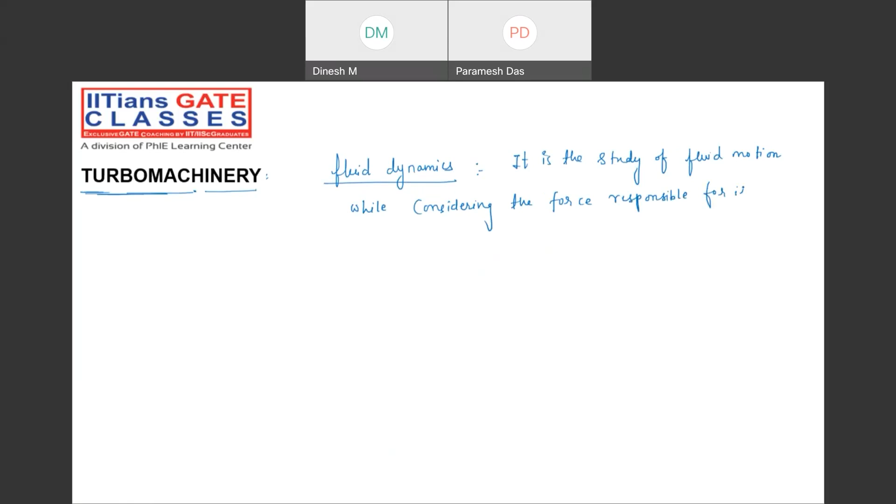Yes or no, guys? So when I talk about the total energy, whatever we have covered from the Bernoulli equation, there is a limitation in Bernoulli, right? When you follow a very good standard textbook, you will find that Bernoulli's equation has some flaws. Can you tell me which flaws? What are the limitations of the Bernoulli equation?

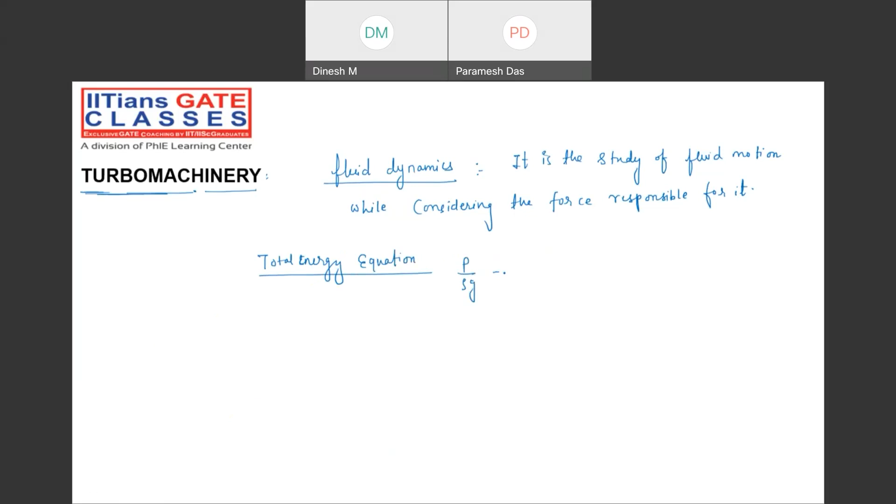Suppose I'm writing the total energy equation as P by rho g plus V square by 2g plus z equal to constant. This is the pressure energy, this is the kinetic energy, and this we call potential energy. Potential energy generally comes from spring force as well as gravity force. Here we don't have any spring forces, so whatever work is done against gravity will be stored in the form of potential energy, right?

Now, first of all, tell me what is the unit of all these parameters? Meter, right? So can I write energy, Newton meter, divided by weight of the fluid? Yes. Energy per unit weight. Now just verify it. Energy is Newton meter, weight is Newton. It will cancel out, and the unit is meter only, right? Perfect. So now just note down the important points.

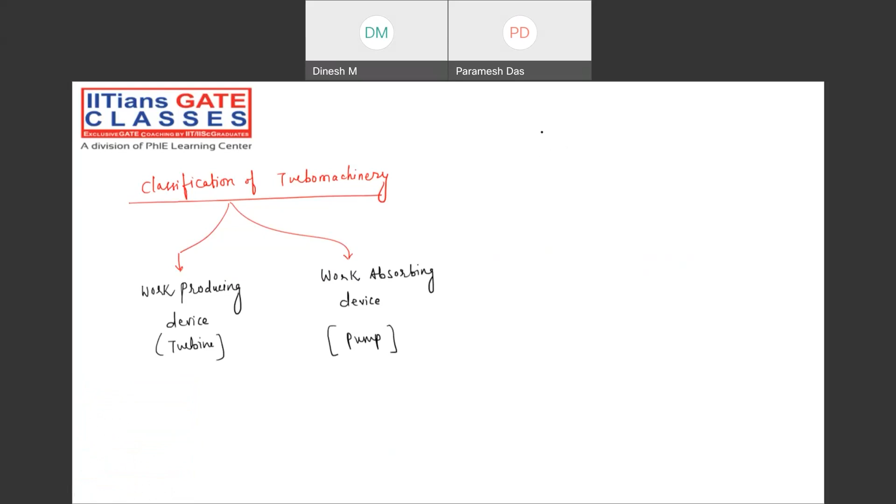And of course, there is a difference between pump and compressor. Compressor is also one type of work absorbing device. But there is a slight difference between pump and compressor. Can you please tell me? Pump is able to handle incompressible fluid, whereas compressor is able to handle compressible fluid. Pump is for liquid, for incompressible fluid, and compressor is for compressible fluid, gases. Yeah, that is correct. But can't we use compressible fluid in case of pump? With the help of pump, can't we send it?

You can write for pump: for incompressible fluid. And here you can write for compressor: for compressible fluid. One more difference is there. Pump is used to increase the pressure of the fluid, right? Yes or no, guys? But if you observe, in case of compressor, it is used to increase both temperature and pressure, right?

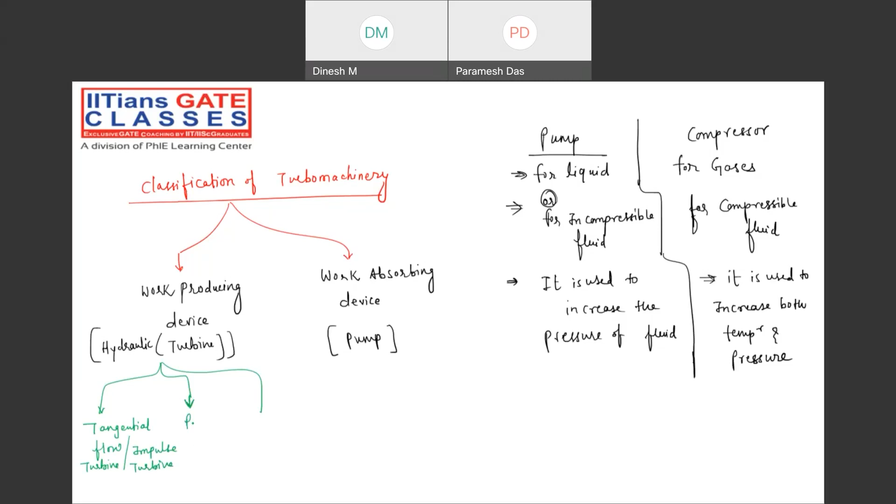Okay. Then can you please tell me the examples for those? Tangential flow, such as Pelton turbine. Tangential flow. Can I call this tangential flow an impulse turbine? Yeah, obviously, impulse turbine we can also say. Pelton and impulse are the same. Now, can I call reaction turbine? No, reaction is different. Reaction is a radial flow turbine. Yeah, that is what I'm saying.

In the reaction turbine category, when the pressure and kinetic energy both change for the fluid, then we say reaction turbines, right? In the impulse turbine, what happens? The pressure will be constant, only the kinetic energy changes. We sometimes call the reaction turbine an impulse reaction turbine, because whatever power is generated is generated with the help of both pressure and kinetic energy changes. Yeah, that is correct. Very good. Now tell me, in that category, what will be the example?

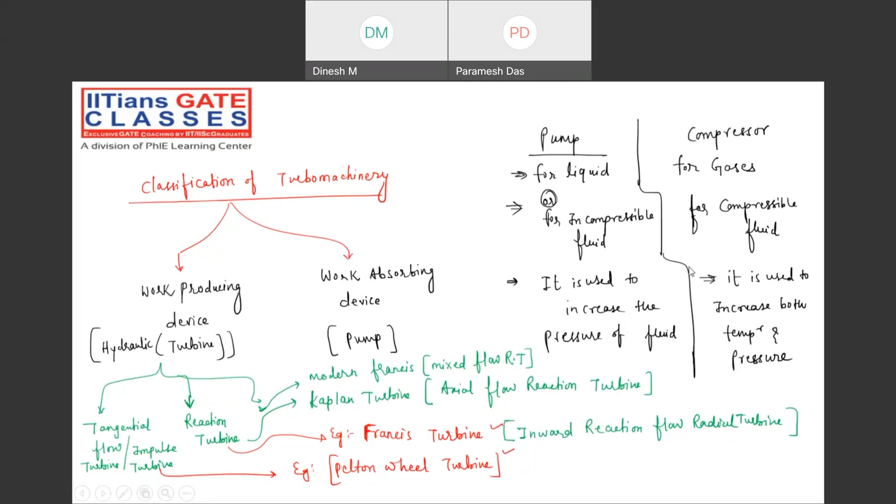Can I move to the next slide? Yes, sir, please. Before that, just note down the books that you need to follow for turbo machines, because that is mandatory. This class will be recorded, and that will be uploaded to the YouTube channel. So I need to tell the students who are seeing the recorded lectures.

So, reference books that you can follow. Of course, Yunus Cengel will be the all-time great book for fluid mechanics and basically for all thermal subjects. For reference books as far as turbo machinery is concerned, you can follow DS Kumar. Rather than saying for problems, I would say follow it for the theoretical portion. The second book will be R.K. Bansal.

Of course, some mistakes are there, but you can avoid them. Not in the turbo machinery, I'm talking about the fluid mechanics. Some mistakes are there, but for numericals regarding turbo machinery, you can follow this book. Right?

Sir, actually, I have one query. In most of these books, such as D.S. Kumar or R.K. Bansal, the coverage is too much. So they are referred mainly for competitive exams like GATE. But I want to know which book will be suitable for interview purposes, because in interviews mostly practical-approach questions are asked, which are not needed in competitive exams like GATE. So you're asking basically for interview, right?

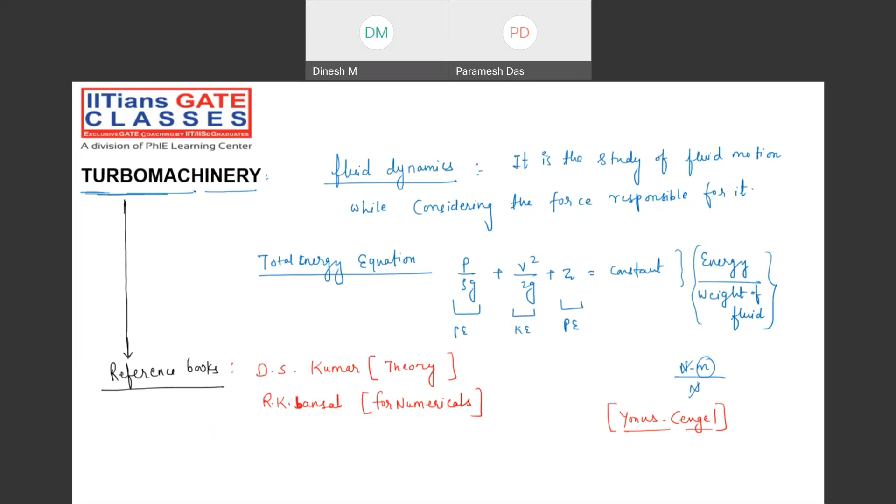In that book, everything is written in a very prescribed manner and in very simple language, so that you can understand easily and explain it to the panel sitting in the interview. When you are able to communicate to the panel members in a layman's manner, so that a layman can also understand what you are saying, they will give you full marks. That is the strategy for all the interviews that are happening. Right? Yes, sir.

So now, there is a very good reason, if I talk about the reaction turbine, and then the impulse turbine. Of course, you might have studied them, so you can correlate whatever I will talk about for the next few minutes. We get shaft power when there is runner power, right?

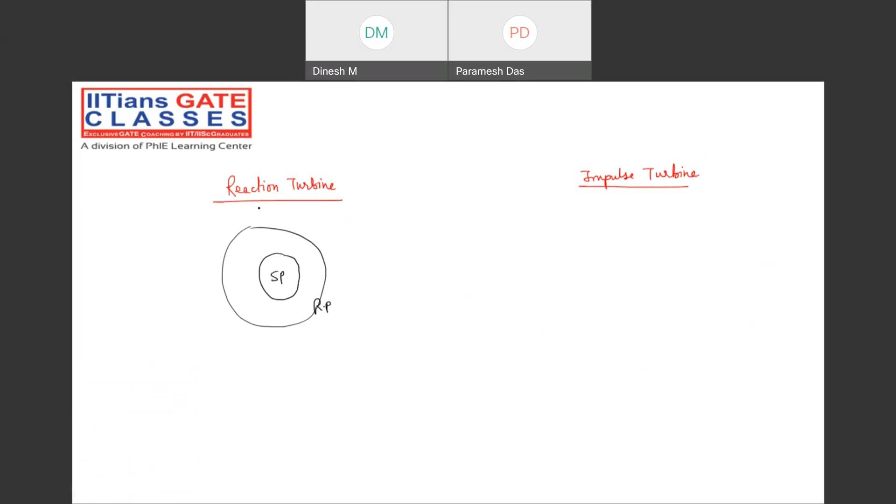Runner power means rotor power, the rotation of the blades. The blades which are attached to the shaft will rotate, and because of that, rotational power will be there, right? Now, from where are we getting the rotational power? From hydraulic power, right?

Yes or no? So within the two stages, 1, 2, we are getting what? Shaft power. Understanding my point? Now, suppose for the same shaft power, of course, that shaft power is coming from the rotational power, right? Or we also say runner power. RP is what? Runner power, right?

We have so many components attached to the hydraulic turbines. It's not only the blades. We have the runner also. That complete portion we call the runner, right? After that, we are having what? The closed chamber. Understanding my point? An outer casing will be there, right? That sometimes we call the diffuser section.

Now, shaft power, then we have runner power. This runner power we are getting in the impulse turbine not directly in the form of hydraulic power. We are getting it first in the form of kinetic energy, because a nozzle will be attached. Understanding my point? Through this nozzle, whatever hydraulic power, water power is there, that has been converted.

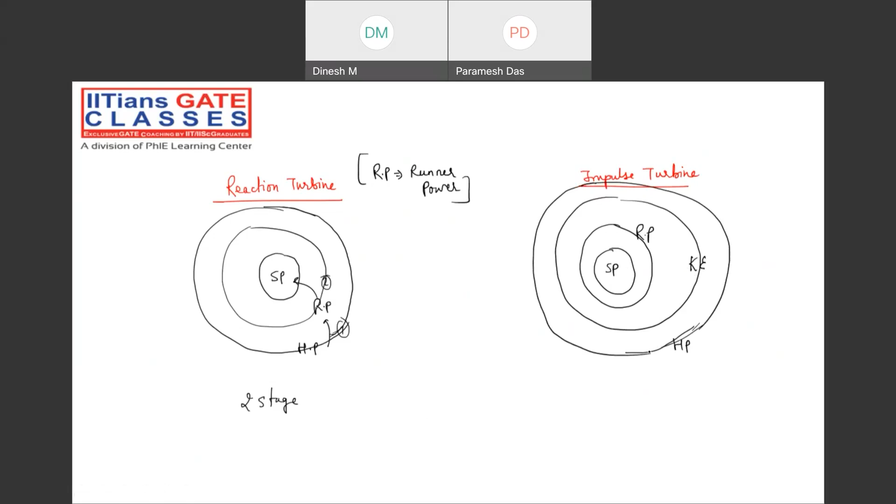First of all, see, this is the storage. Suppose from here the pipeline has been connected. Through this pipeline, the nozzle has been connected. Through this nozzle, whatever happens will be imparted into the blades. So this is the nozzle, this is the pipe, and this is the height.

So through this particular height, whatever hydraulic power is there, mgh, that is going to impart a lot of energy, but that is happening through the nozzle. Many nozzles are placed around the runner of the Pelton turbine. Basically, we are not placing more than 6 because of efficiency losses in the nozzle.

Now, this nozzle is going to have some efficiency. Every instrument has some efficiency; it cannot be perfectly 100% efficient. So first of all, whatever hydraulic power is there has been converted to kinetic energy. What is the efficiency of the nozzle? The kinetic energy of the water imparted to the blades, divided by mgh.

Now, definitely I need to write hydraulic power, then kinetic energy, then rotational power or runner power, then shaft power. So here we are getting the same amount of shaft power in 3 stages: 1, 2, 3. Understanding? Yes, sir. Now, when we get the same shaft power in 3 stages, which is going to have the higher efficiency? Reaction only, right? Reaction turbine.

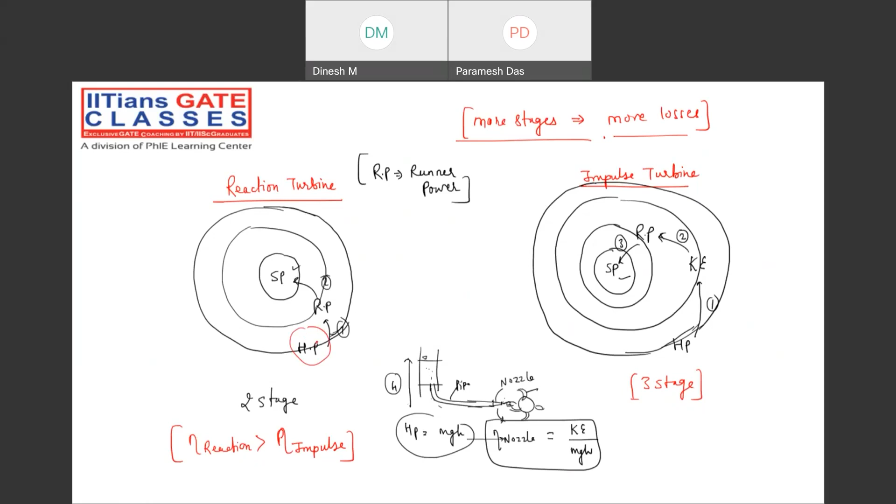So that's broadly the idea. In the reaction turbine, we don't have anything called a nozzle. If the nozzle is not there, the hydraulic power will be converted directly to runner power, right? And that runner power will be converted to shaft power. Understanding my point? Yes or no? Yes, sir. Perfect. Just note down.

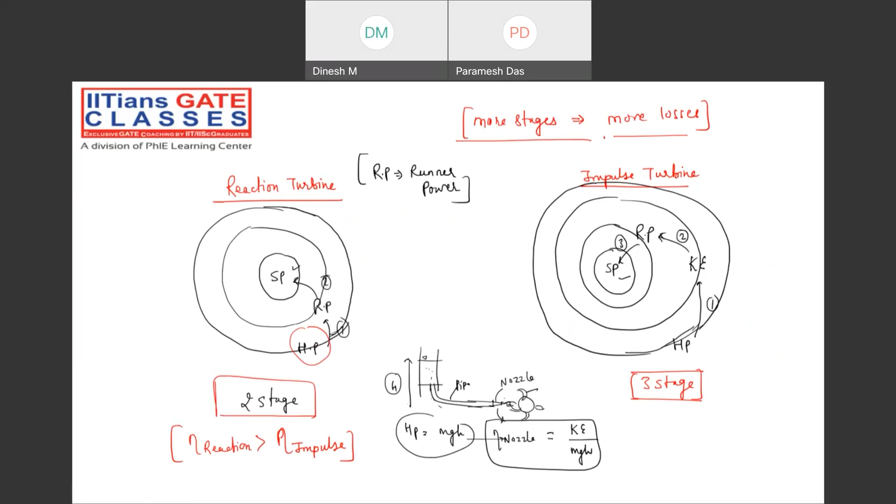Once done, let me know. Yeah? Noted. Noted, right?

Now, when we are going to start turbomachines, before that we need to clear some fundamentals about the impulse momentum equation, because without it nothing can be done in turbomachinery. So what is the impulse momentum equation? The rate of change of angular momentum between the inlet and outlet of the blade is equal to the torque.

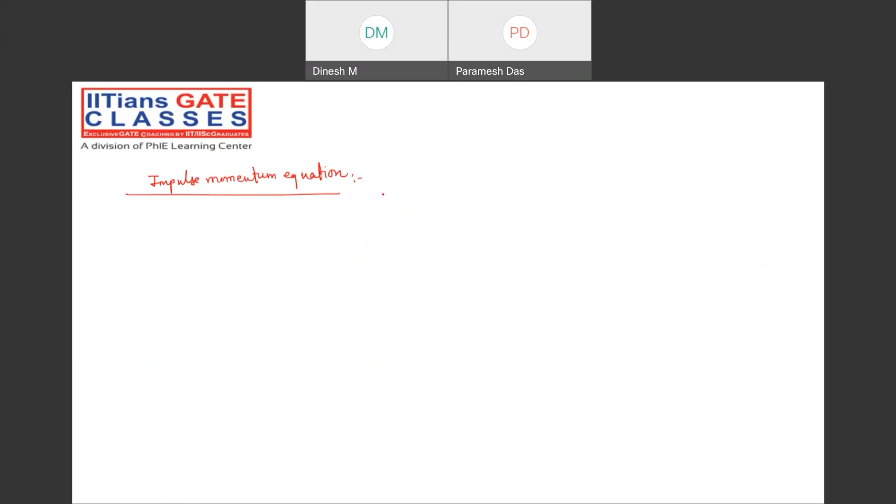Rate of change of momentum is directly proportional to force, right? Yes, sir. Force is nothing but the rate of change of momentum. In equation format, momentum is m into v, right? So force I can write as mass flow rate into v final minus v initial. That depends on which force you are calculating. Vf is nothing but v final, that is the final velocity.

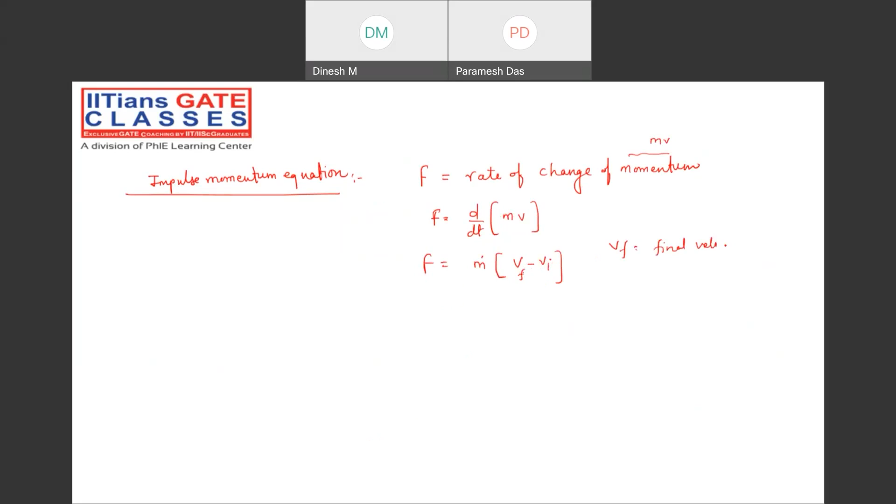Vi means suppose that initial velocity. Then what is the force, my dear friend? Suppose I'm taking one example: impact of jets. Did you cover this topic? Yes, sir. Okay, perfect. So in this also we will see a lot of things, and that will be beautifully explained: impact of jets, like when the plate is vertical, horizontal, inclined, or maybe it is having some curvature, then what is the amount of force that has been exerted.

Now let me just tell you an example. There is a nozzle. Through the nozzle the water has been coming out. Now this has been exerting the force onto this particular plate. Suppose that this is a plate. Because of the water forces, this plate will try to move to the right direction, right? Yes, sir. Now to hold on that, we need to apply some kind of force.

This force will be called force exerted by plate onto the fluid element, right? And whatever the water force will be there, that I'm going to call F1. Let me call this to be F2. Of course, F1 will be equal to F2, but the direction will be opposite. Understanding my point? Yes, sir. So F2 is the force exerted by the plate onto the jet of the fluid.

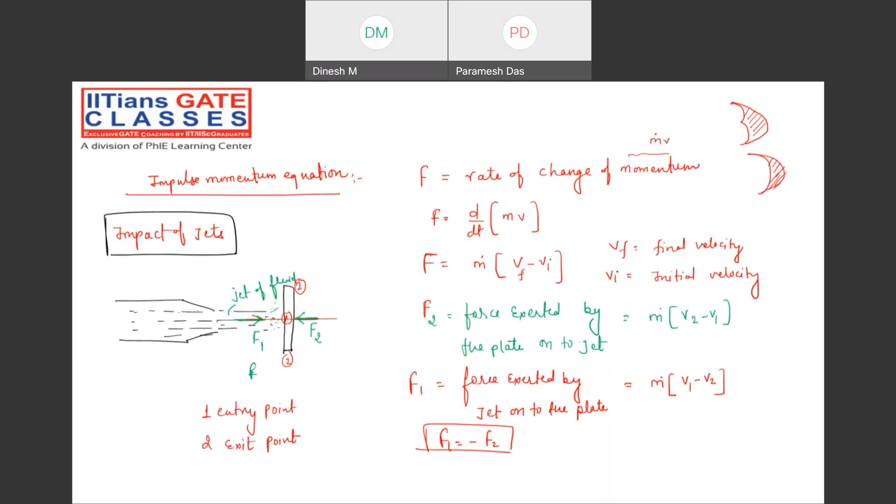Now, once it is done, let me know. Yes, sir. Note it down. Done. Okay.

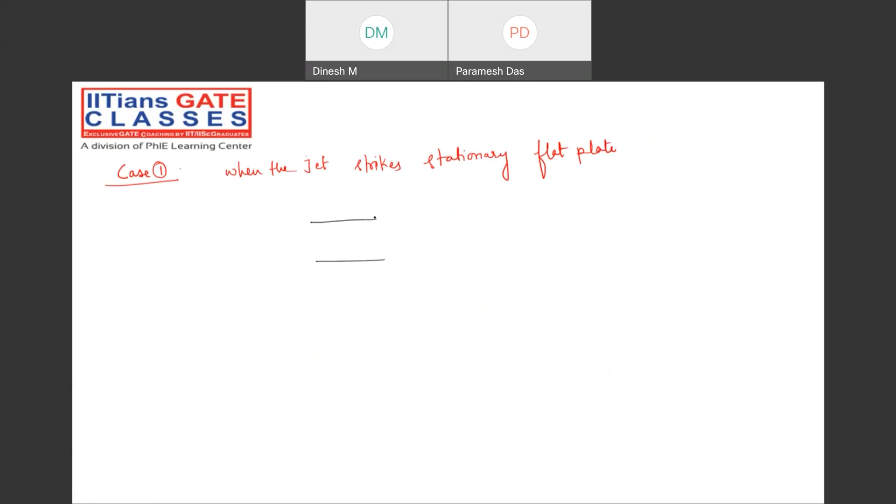Now try to understand. Case number one is when the jet strikes a stationary flat plate. What is going to happen? Let me draw the figure for this case. The water is coming out from this nozzle, and there is a vertical plate, and this plate is fixed, my dear friend. So this plate cannot move to the right direction by the application of force by the jet. Now tell me, what is the initial velocity?

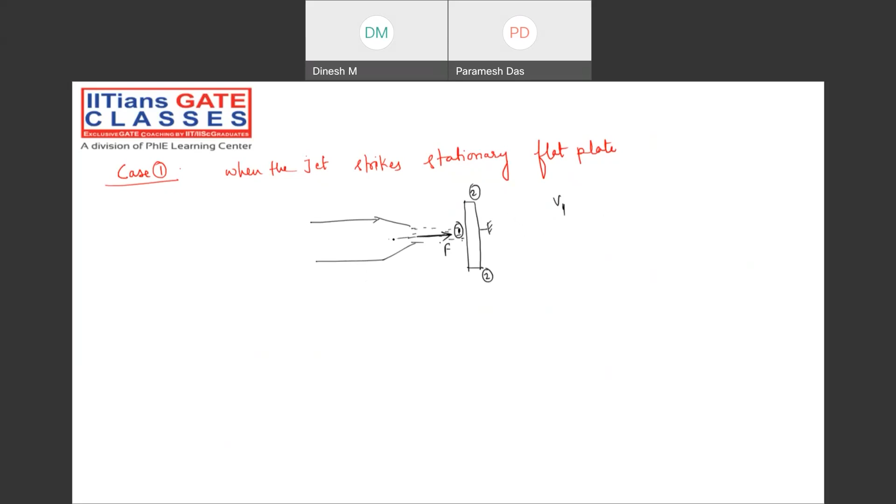1, 2. What will be the initial velocity? Tell me, guys. V1, right? Whatever velocity the water is coming out with, that will be V1. Now tell me, what will be the final velocity, my dear friend? Let me call V1 to be V. Whatever the velocity with which the water is striking this particular plate, that is called V. This is the nozzle jet through which the water is coming out.

Now tell me, guys, what is going to be happening over here? This jet is forming the diameter to be d. Now tell me, after striking the plate, this water will be taking the shape like this or not? Yeah. So initially, whatever the velocity is there, what will be the final velocity in x direction?

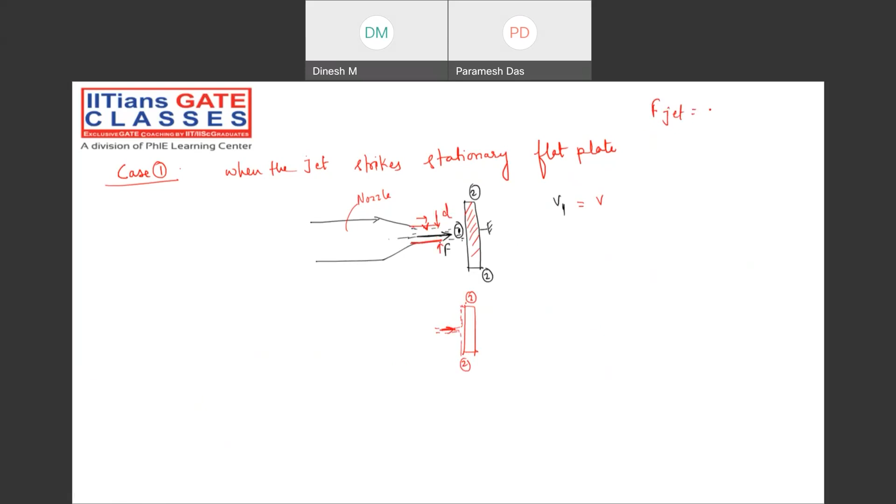See, whatever the formula we are writing, force of the jet onto the plate equals mass flow rate into V initial minus V final in the x direction only, not in the y direction. So here, after striking, it is moving like this. Check it out. So finally, the velocity at point 2 is 0 in x direction.

Right? So what will be the force exerted by the jet or stream of fluid onto the plate? That is the mass flow rate into V. Now, how to calculate the mass flow rate? Rho into Q. Now, how to calculate Q? Whatever discharge is coming from the nozzle, the same discharge will be coming out from the jet also. So directly I'm writing Q will be equal to pi by 4 d square into the velocity with which it is coming out from the nozzle, right?

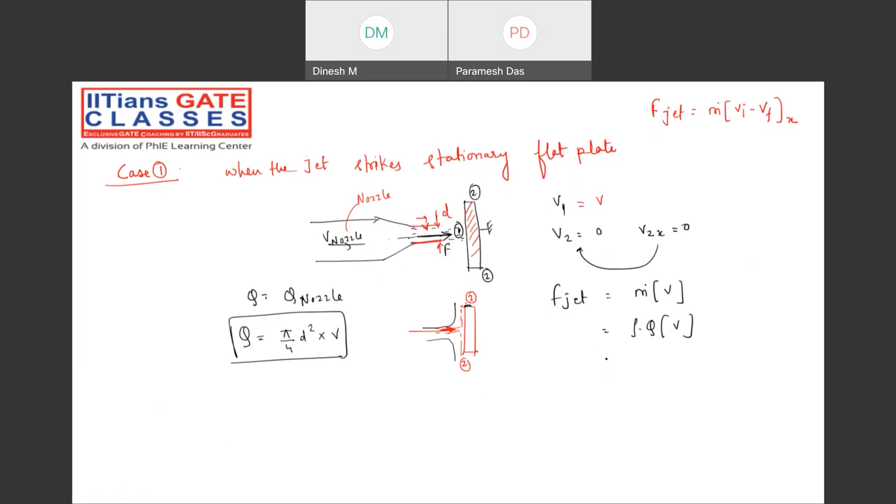It is coming out with the velocity V, but in the nozzle, it may have a different velocity. We are not bothering about that, right? So here we can write Q is equal to area of the flow into velocity, so rho into A into V into V. So what is the force exerted by the jet? Rho into A into V square, right? In the x direction, the force exerted by the jet will be this one. Yes or no, guys? Perfect. Just note down, very, very important.

So here, the impact is exactly at the middle point. Sometimes we call this the symmetrical condition, so that it is striking exactly at the middle. Whatever velocity is coming through the nozzle, it is striking at the center line of the plate. Now, what are the forces in the y direction?

Whatever force you have calculated, of course, that is fine. But when you are fixing this by some hinge joint, it is going to have reaction forces in the x direction as well as in the vertical direction. The horizontal reaction you have calculated, that is fine. But what about the vertical reaction forces, my dear friend? For that, we need to find the force of the jet in the y direction. Am I right? How to calculate that? First of all, tell me what is the answer for this question?

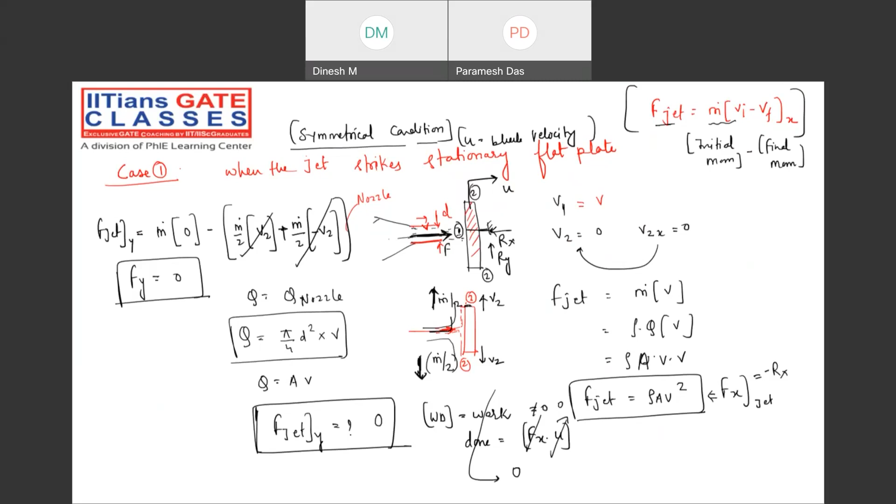Again, I will be giving you the question for one more case. You try to solve it for the next 2 minutes, then I will give you the solution. Now, instead of considering the stationary flat plate, let me take the movement of the plate. The plate is also moving with some velocity called u. Sometimes we call it blade velocity. Here, the blade is not there, a vertical plate is there, so we call it plate velocity.

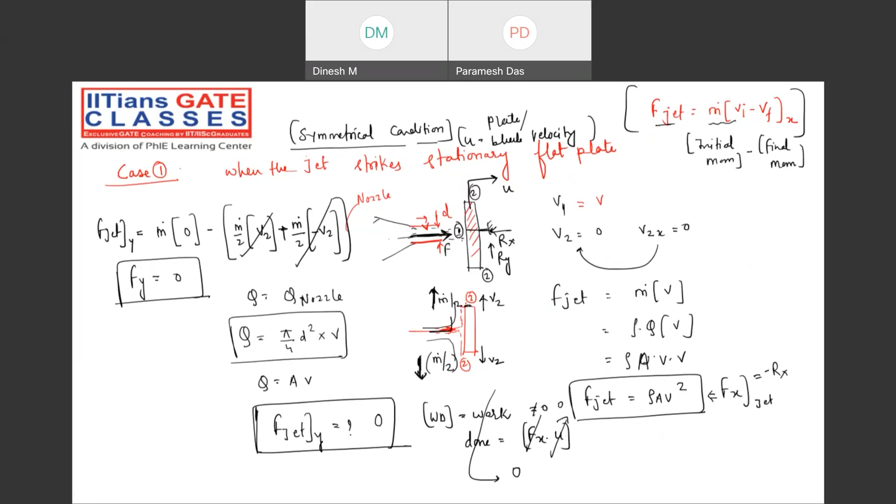Yes, sir. Now, is it done? Can I move to the next case? Yes, sir. Perfect. Now, try to understand. It's one of the very important cases. Case 2: jet strikes the moving flat vertical plate.

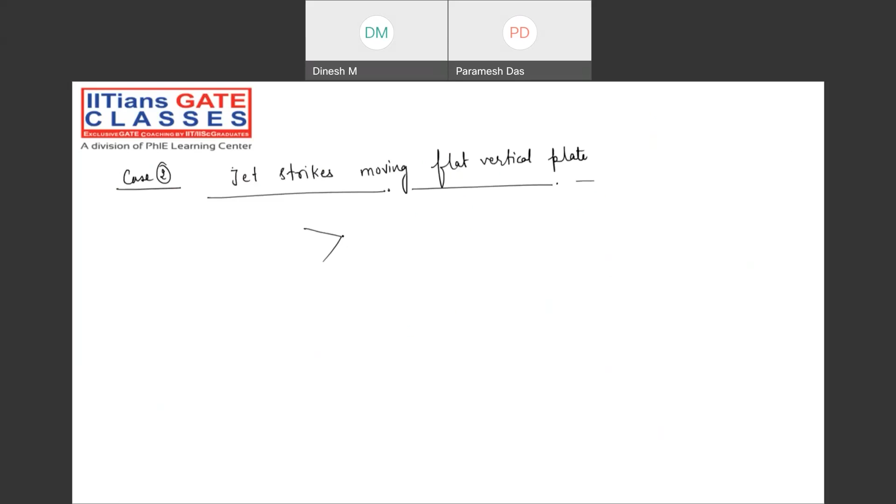Now I will be giving the options also, do not worry. So this is a nozzle, now it is striking. The jet stream I'm representing by the lines. This plate is moving with some velocity u. I'll be asking you so many questions, so you need to be very careful. Here I'm considering point 1 and point 2. What is point 2? Exit point. What is point 1? Entry point. Entering point, leaving point. Right?

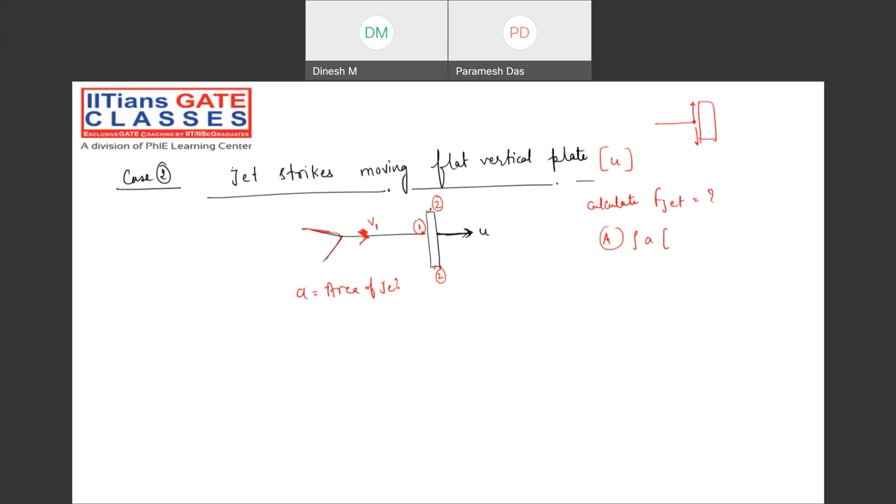So here I'm considering the jet striking the moving vertical plate, which is moving with some velocity u. Calculate the jet force. I'm giving you the options, very important: rho into... The inlet jet velocity is V1. So rho into area of jet, that is pi by 4 d square. I'm not writing completely. Rho into A into... none of the above. Now you try to solve this first question.

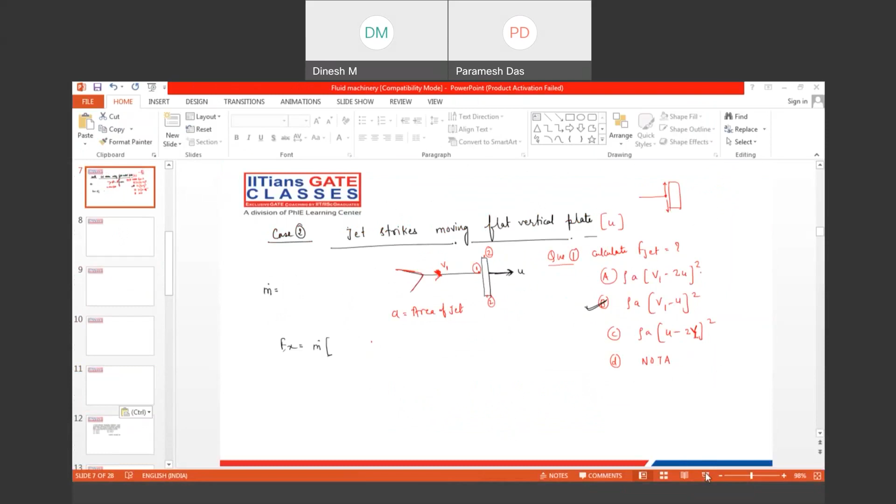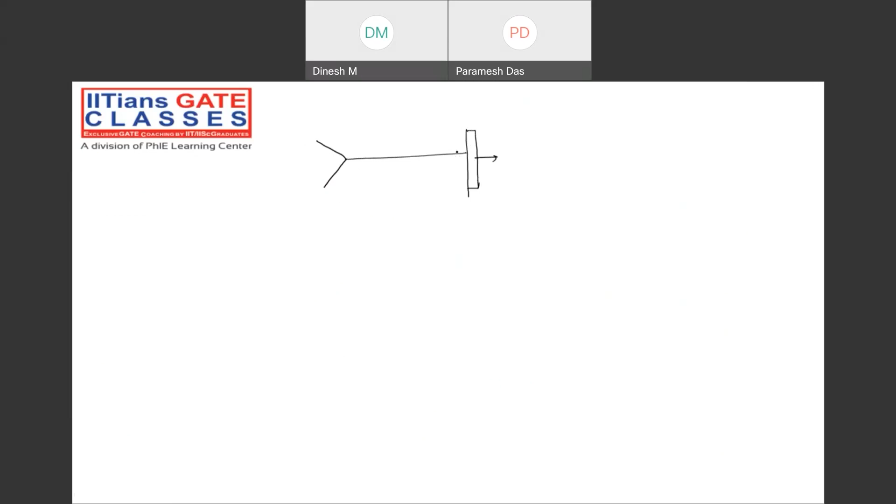Now this is one of the very important questions. A lot of assumptions have been made, but that has to be clarified. So this is the nozzle. This is a jet of stream that is striking the plate like this. This is moving with some velocity. So this is my inlet point 1, and point 2 is what? The outlet point. Now try to understand.

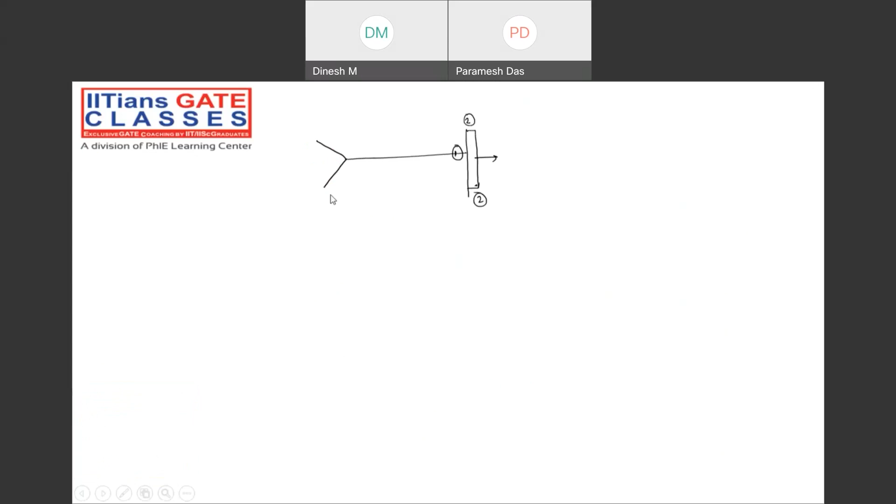Now, my dear friend, what will be the mass flow rate? Rho into A into V1, or what? Tell me, guys. Here the total velocity is V1, that is the jet velocity, right? Yes or no? But my dear friend, you already know in the vector format, suppose this is the velocity, and the blade with which it is moving has velocity U1. Then what about this one? VR1. What is VR1? Relative velocity at the inlet.

Why are we getting the relative velocity? Tell me. Because vector V is equal to vector VR plus vector U. Understanding my point? Absolute velocity will be relative velocity plus blade velocity. Suppose you are writing the velocity of point P with respect to Q. Velocity of P will be velocity of P with respect to Q plus velocity of Q. Check it out.

In the same manner, what are you going to write? The velocity of the jet will be the velocity of the jet with respect to the blade plus the velocity of the blade. Understanding my point? Tell me, guys. Yes or no? Yes, sir, I got it. Yeah. So that is where the relative concept comes in here.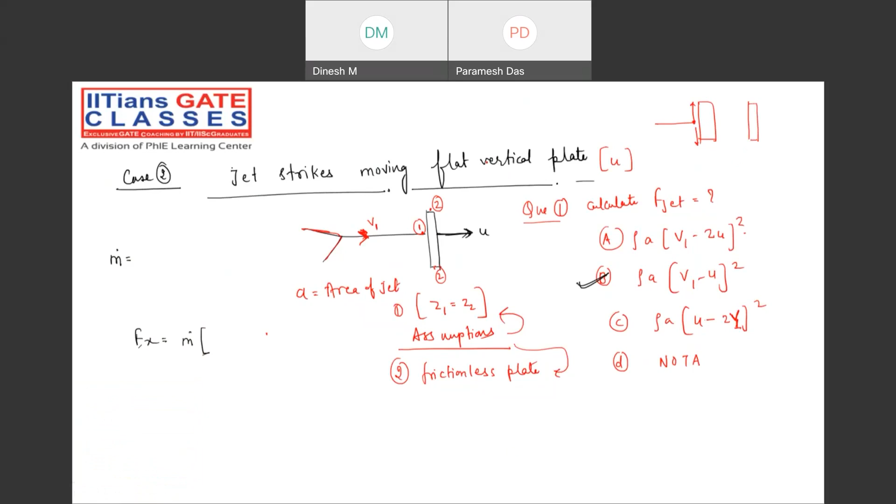And the second assumption we are going to consider is a frictionless plate. There is no friction on the plate. Assumption number 1 and assumption number 2, very important. Somebody will be thinking it is a vertical flat plate. Of course, I have written vertical, but that is not the correct word. Just note down flat plate. This flat plate is placed in the horizontal plane, not the vertical plane, so that point 1 and point 2 both have the same height. Z1 equal to Z2.

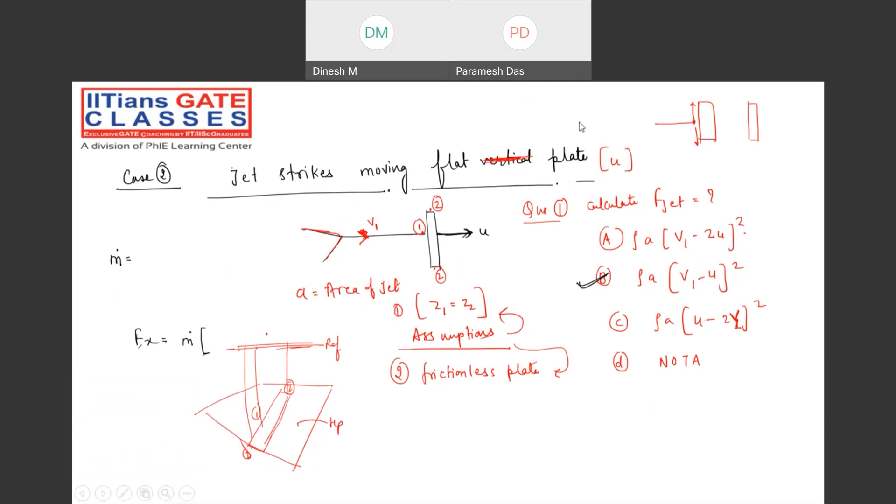Point number 1, point number 2, and this has been the reference point. So this is just like a horizontal one, so the height will be the same, right? Yes or no? It is placed on the horizontal plane. From the horizontal plane, the reference height will be what? Same only, right? Yes or no, guys? Yes. Yes or no?

Now, what will be the outlet velocity triangle? That is the next question, my dear friend. Tell me. What will be the outlet velocity triangle? Right angle. Yes. Right angle triangle. Why will the right angle triangle be formed? Why will the right angle triangle be formed? See, u is having velocity like this. Am I right? Yes, sir.

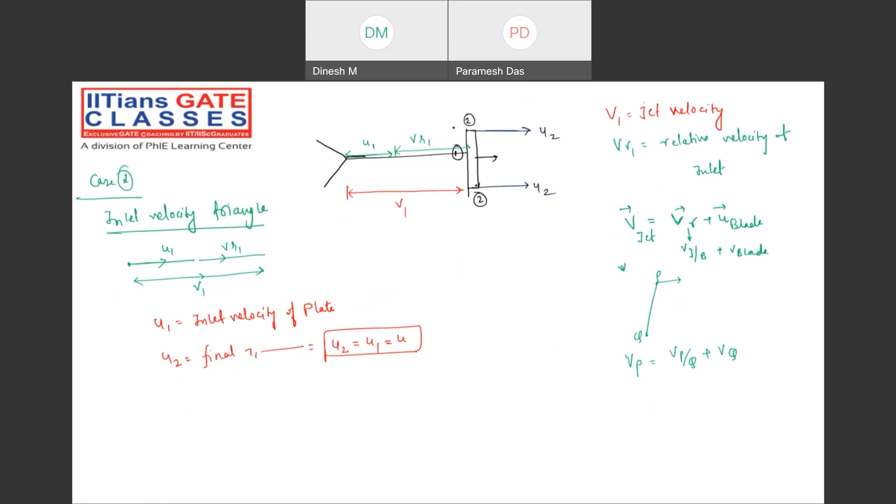That is, the blade is moving in the positive x direction. There is no doubt. But my dear friend, the velocity of the fluid with respect to the blade is moving in the what? Vertical direction, right? Check it out. Velocity of the fluid with respect to the blade is moving in the vertical direction. Can you please check it out?

So now you join by vector addition. What is vector addition saying? Suppose vector A is equal to vector B plus vector C. Then what do we do? Vector B, vector C. Then we join this thing by vector A. Am I right? Check it out. Yes, sir. Right? Now try to understand.

I'm joining this vector, suppose I'm calling this VR2. The relative velocity of the fluid element with respect to the blade. That is VR2, our relative velocity at the outlet. And now let me join. This is vector A, let me call this B vector, this is vector C. Now we have to join this by another vector, that will be my absolute velocity V2.

Check it out. The velocity of the fluid will not be in the vertical direction, not in the horizontal direction. It will be in the inclined direction. Check it out.

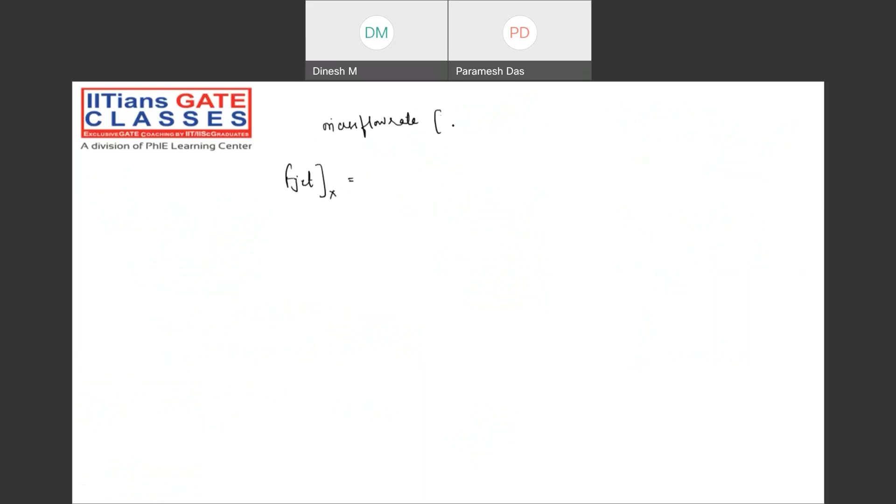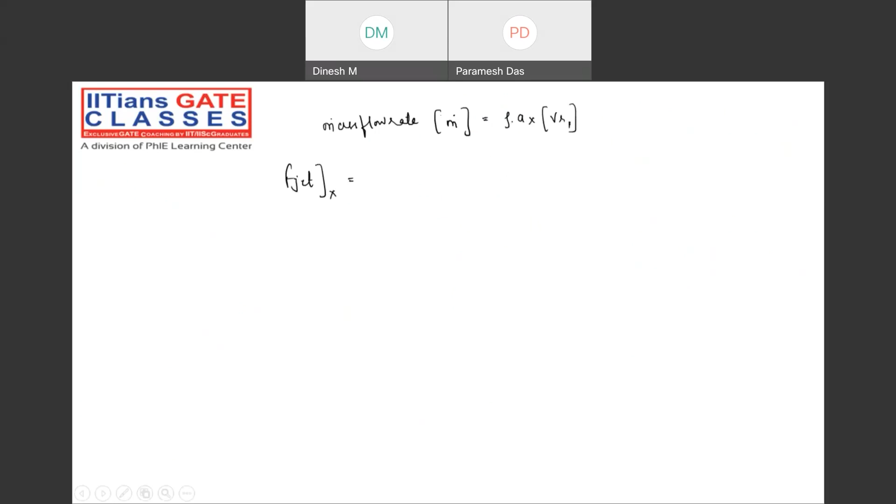The force exerted by the jet onto the fluid element in the x direction will be mass flow rate times... What is the mass flow rate? The mass flow rate will be rho into area of the jet into relative velocity. Relative velocity, because the fluid coming out from the jet does not strike with the same velocity with which it comes out of the nozzle, since the plate is also moving.

So now what will happen? The condition is that the plate is also moving. Now what is the effective velocity with which it is striking? That will be V minus U. And V minus U is what? VR only, right? So the mass flow rate will not be rho into A into V1, it will be rho into A into VR1. Of course, A is the area of the jet. That is one of the very important things that you need to understand.

Now, the force exerted by the jet in the x direction will be the mass flow rate, whatever the mass flow rate that has been striking, into the velocity with which it has been striking. Effectively it has been striking with the velocity called VR1. VR1 minus the velocity in the x direction with which it is leaving. Effectively it is leaving with what? 0. Then what can we write?

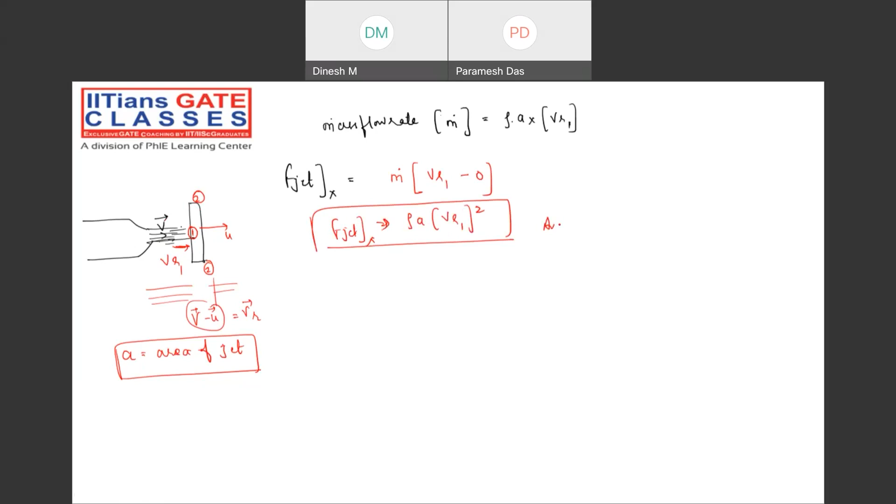Rho into A into VR1 whole square. That is the force exerted by the jet onto the plate in the x direction. That will be the answer. You can also write rho into A into V1 minus U whole square. Now, why are we writing U1 in the form of U? Because U1 equal to U2 will be equal to U. So please make a note of it. This is a very important segment.

So this is the first method. In the first method, we just placed the observer onto the plate itself. The observer is sitting on the plate. That means the observer is sitting on the reference frame. Now the observer is moving with the plate velocity, so it is not going to feel any velocity. The final velocity will be 0, right? So that is the first method.

Now the second method will be more interesting for you guys. Now try to observe. The observer is not sitting on the plate. It is just outside of the plate, observing from outside. Now, if you observe from the outside, what is going to be the force exerted by the jet in the x direction? Mass flow rate into initial momentum. First of all, it is going to strike the plate with the velocity v1

minus mass flow rate into the velocity with which the fluid is leaving this particular blade in the x direction, the velocity called u2, and of course it is equal to U only. So again you are going to get the same answer, my dear friend. Rho into A into v1 minus u whole square. This is what we have, in Newton. Please note down the force exerted by the jet onto the plate as observed by the observer.

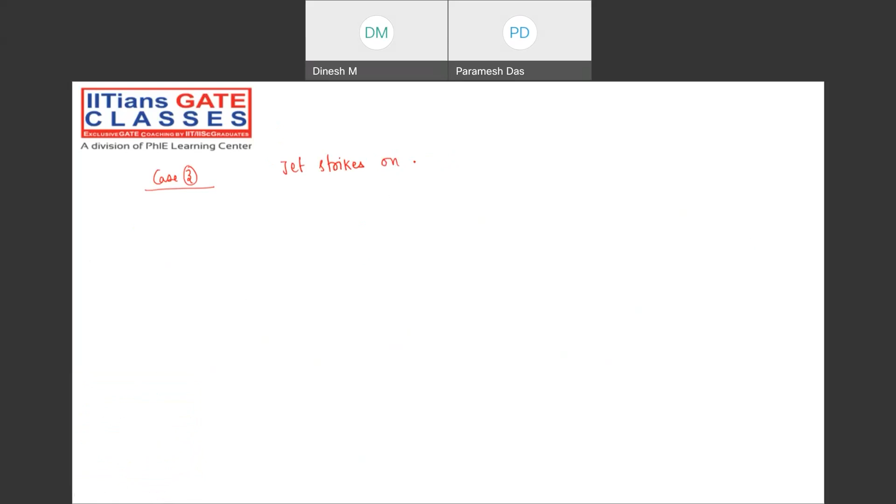Now, try to observe the next case, case number 3: the jet strikes on a moving inclined plate.

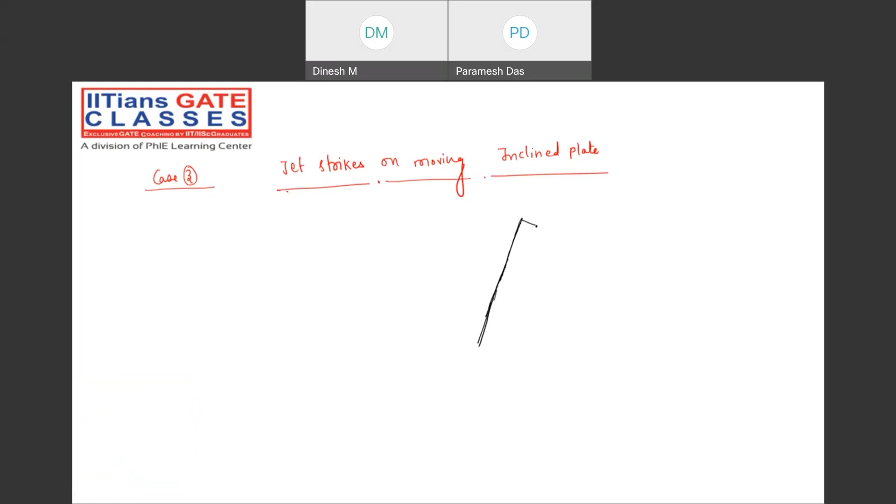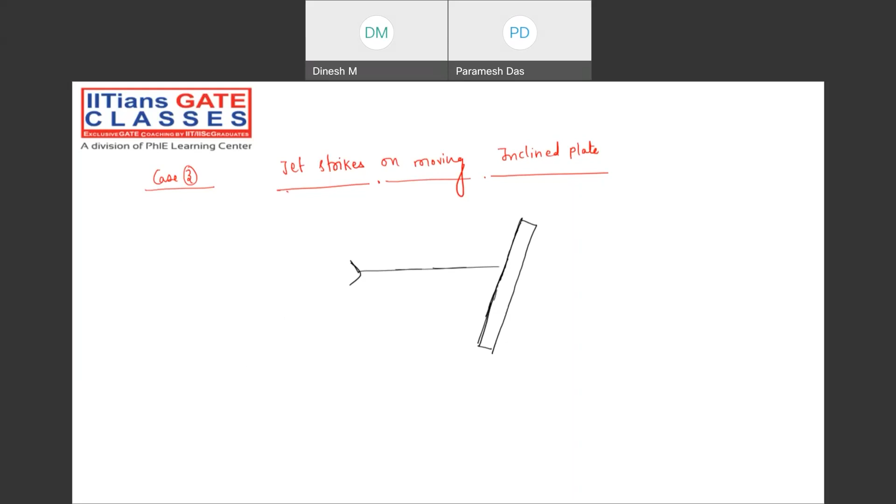Now, when the jet is striking on the moving plate, what is going to happen in this particular case, we need to observe. Suppose water is striking this. The jet stream is coming out from the nozzle onto the inclined plate. For this, we need to draw the inlet velocity triangle and outlet velocity triangle.

Of course, I'm going to take the same notation. Suppose the blade is moving with some velocity called u, or let me call it u1 equal to u2 equal to u, because this particular plate is on the horizontal plane. So it is going to be u1.

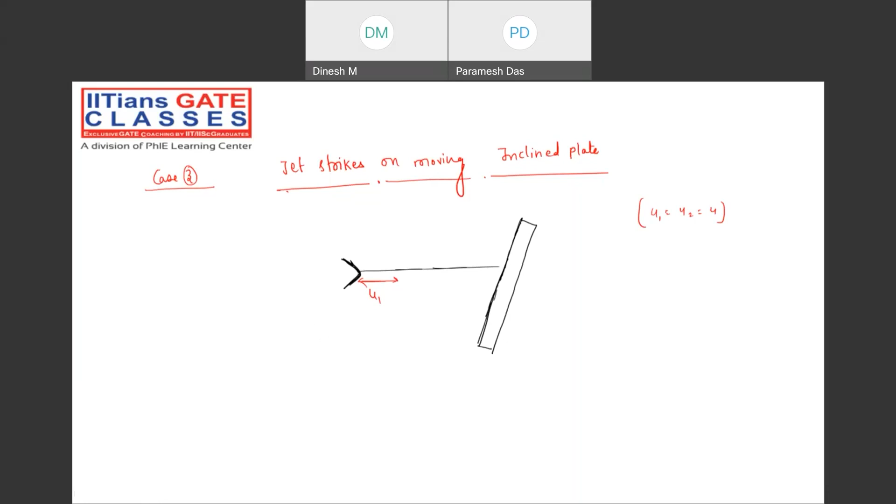So the inlet velocity triangle will be the same, and combined together we call it V1. That is going to be the same, there is no doubt about it. But my dear friend, here, of course, the mass flow rate will be the same: rho into A into VR1, that is equal to rho into A into (V1 minus U). That is going to be the same thing here also.

But first of all, we need to calculate. This is point number 1. This is point number 2. What will be the outlet velocity triangle? The plate is moving in the horizontal direction like this. The fluid is leaving with respect to the plate. The relative velocity of the fluid with respect to the plate will be like this only. That is my VR2.

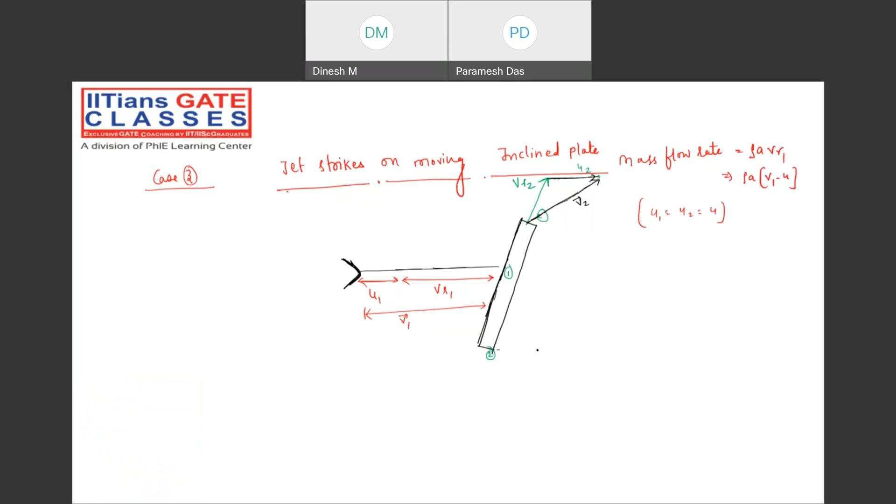Now from vector addition, what will be the absolute velocity of the fluid with which it is coming out from the plate? It is going to be V2 like this, right? So this will be my velocity triangle, my dear friend. The same case you can draw here also. It is something like this, U2. This is VR2. Of course, U2 equals U1, so there is no doubt about it.

So for this case, point number 1 is here and point number 2 is here. This is the nozzle. The jet of stream is coming out and striking the plate, something like this. So U1 equal to U2 equal to U. Coming to the next segment, we need to find the force exerted by the jet in the x direction.

We need to find the force exerted by the jet on the plate element that has been moving with the velocity called U. So the mass flow rate, you got it. Now, first of all, we have to calculate the normal force with which it is striking the plate. So the normal force will be something like this. If this normal force is inclined like this, what will be the component of VR1 in the normal direction?

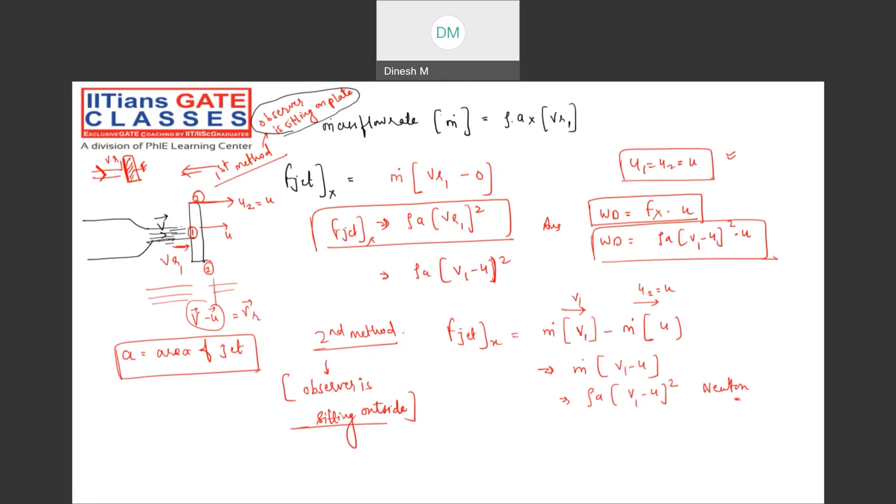If you write it like this, one component will be coming out like this, one component like this. So this will be theta, this is VR1. So this is VR1 cos theta, and this will be VR1 sine theta. So try to follow the first method. The first method says the observer is sitting on the plate itself. When the observer is sitting on the plate, he will assume that the plate is stationary and the fluid is striking with the relative velocity VR1.

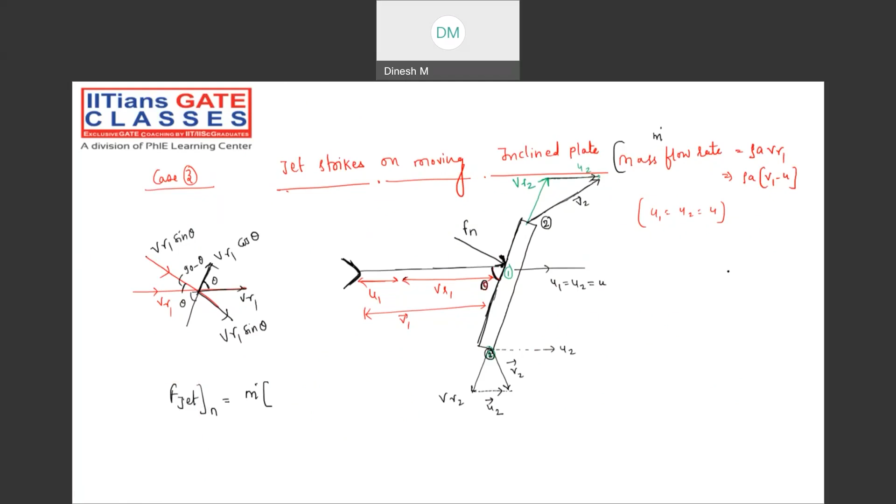So the force exerted by the jet in the x direction will be the mass flow rate with which the water is striking, times the relative velocity at the inlet section. But we are calculating not in the x direction, we are calculating in the normal direction first of all. So in the normal direction, it is just a plate. The water is coming with the velocity VR1 sine theta, and the final velocity in that direction will be 0. So that is my first approach. So VR1 sine theta.

So rho into A into VR1 square into sine theta. That will be my normal component of the force, Fn. Now that will be the normal component. What will be this normal component in x direction? If this is going to be theta, this is also going to be theta. So what about this component? This is what I am having, Fn component.

Now if I'm going to resolve in the x direction and y direction, then what I'm going to get? This will be 90 minus theta. So this Fx will be Fn into sine theta. And Fy will be Fn into cos theta. So Fx, that is the force exerted by the jet in the x direction, will be,

Fn. What is Fn? Rho into A into VR1 square into sine theta into sine theta. So rho into A into VR1 square into sine square theta. That will be the final answer. Please note down the final answer. Rho into A into VR1 square into sine square theta. That will be the force exerted by the jet in the horizontal direction.

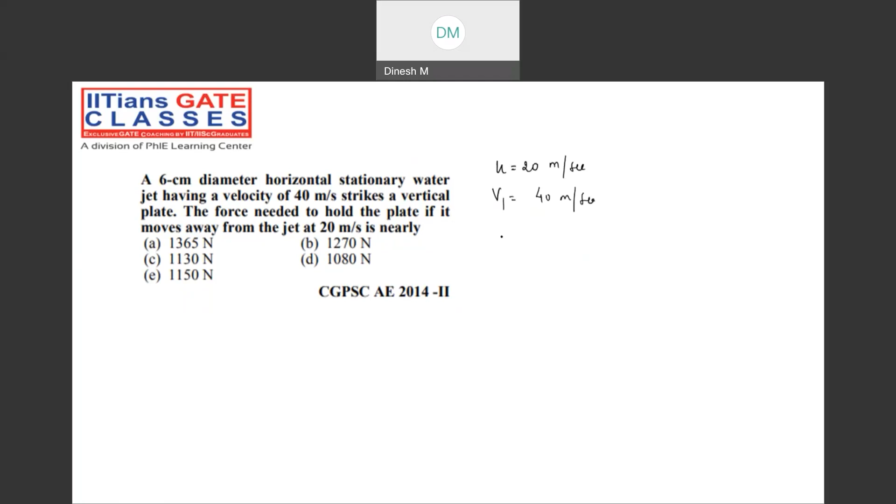A 6 centimeter diameter horizontal water jet having the velocity v1, that is 40 meters per second, is striking a vertical plate. The force needed to hold the plate if it is moving away from the jet at the velocity u of 20 meter per second. Now they are asking what is the force needed when the jet strikes the plate which is moving with the velocity u.

We know that the force exerted by jet in the x direction will be mass flow rate into VR1. So force exerted by the jet in the x direction will be rho into A. Rho is 1000. Area is pi by 4 d square, 0.06 whole square. V1 minus U, that is 40 minus 20 whole square. So calculate and let me know the answer. You'll be getting 1130 Newton. That is option C.

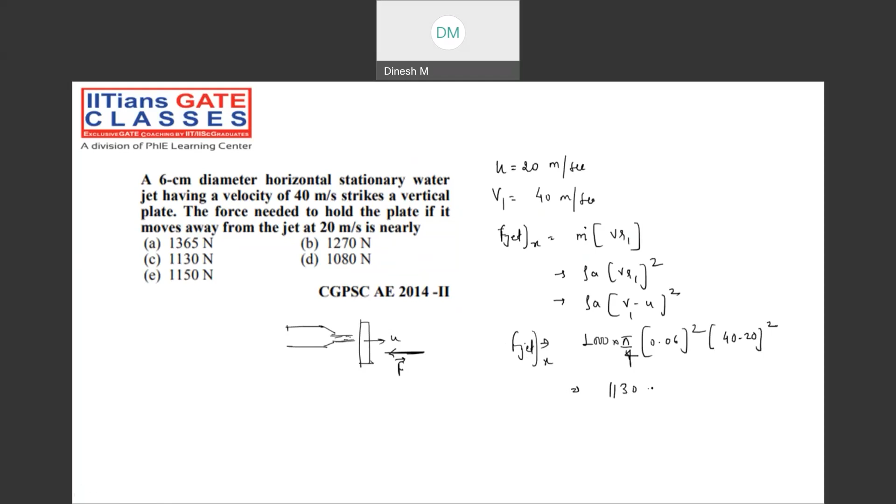That is the force with which it is striking, my dear friend. But what will be the opposition force that is going to be required? Opposition force or reaction force will be opposite of that. So the reaction force will be minus 1130 Newton. Of course, they are asking only magnitude, so we are not bothering about the sign. Based on the standard sign convention, this is going to be plus, this is going to be negative, right?

Now, moving on to the next question. A 75 mm diameter water jet having the velocity V1. Remember, it's not a nozzle velocity, it's a jet velocity. That means from this nozzle, the jet is coming out. So this will be the final diameter. With respect to that only, we have to calculate the area. V1 is 12 meter per second. It impinges on a plane which is inclined at an angle of 60 degree.

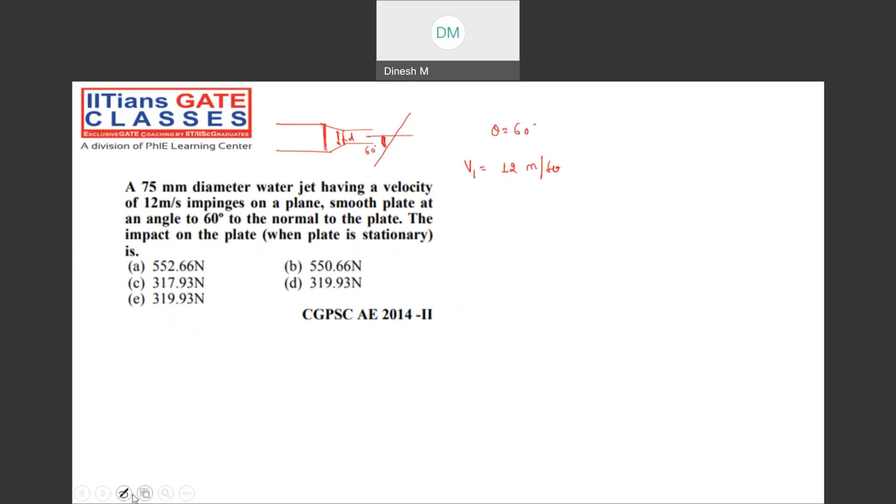Theta has been given 60 degrees, normal to the plate. The impact on the plate will be what? They are asking what will be the impact normal to the plate. That means they are simply asking me the Fn force, and the Fn force we already derived by the formula rho into A into VR1 square into sine theta. Sine theta, right? Of course, 60 degrees we need to consider.

Of course, they have played a very small trick. They have mentioned that the smooth plate is inclined at an angle of 60 degrees normal to the plate. See, this water is coming out from the nozzle in the form of a jet at an angle of 60 degrees normal to the plate. This is the velocity with which it is coming out in the form of a jet, and this is the normal to the plate. This angle is 60 degrees.

Then what about theta? 30 degrees, my dear friend. So theta is not 60, theta is 30. So that is the small trick in this question. Nothing else is there. So now rho is what? 1000. Pi by 4, 0.075 whole square. VR1, what is the relative velocity? V1 minus U1.

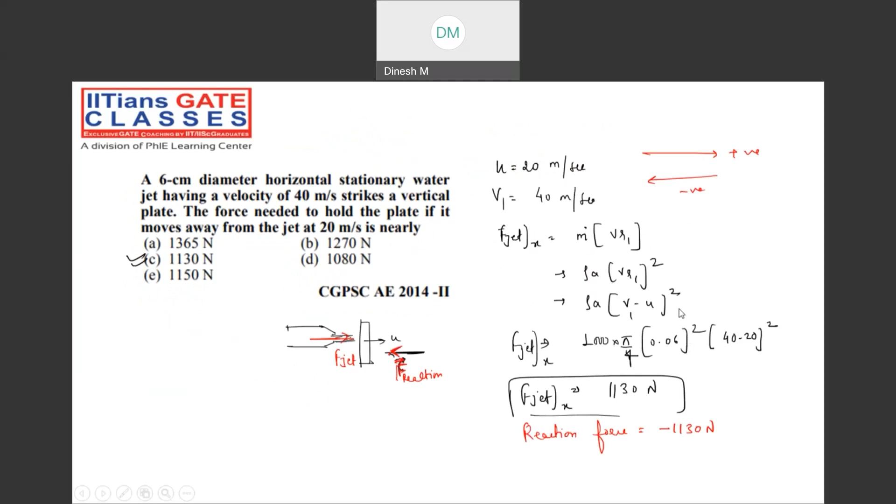Right? Whatever question we are solving right now, that is a simple case. But we have already seen a big case, that is the moving inclined plate. But they are asking about a stationary plate. Simply put, U is equal to 0. So what will be the answer? V1 square. So simply 1000 into pi by 4, 0.075 whole square, V1 square. What is V1? 12 square.

So Fn will be 317.925 Newton. That is going to be the answer. So option C will be correct. So that sort of thing is very, very important while solving the questions.

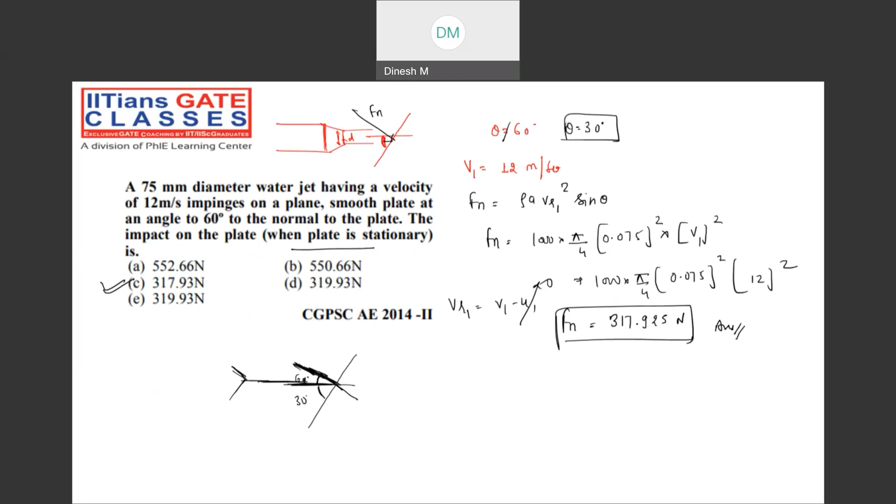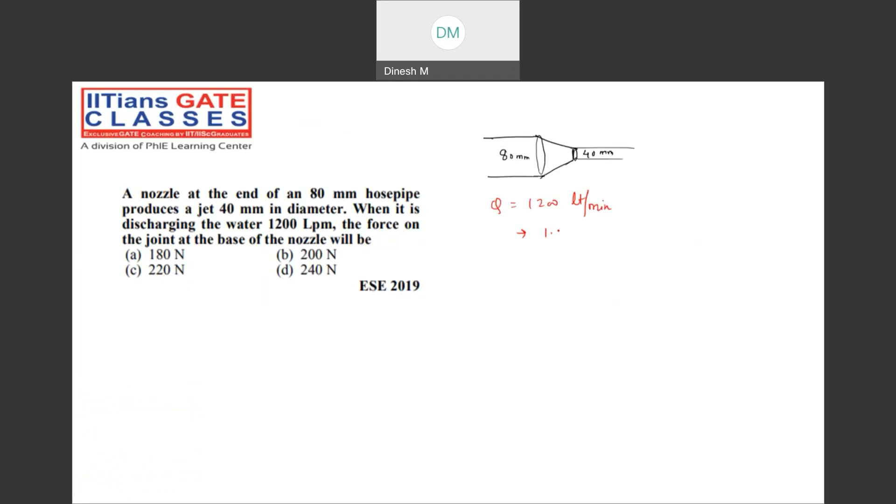Now, moving on to the next segment. Before solving this particular problem, try to observe this question. A nozzle is connected to the hose pipe like this, having a diameter of 80 mm at one end and 40 mm at the other end in the form of a jet. Now, it is discharging water at 1200 liters per minute, that is 1.2 meter cube per minute. So that is the discharge value with which it is coming out from the nozzle.

They are asking the force on the joint at the base of the nozzle. Suppose this nozzle is at the joint here; then what is the force exerted on the joint, basically on the base of the nozzle, in the horizontal direction? So simply they are asking the force exerted by the fluid onto the joint. Whatever the pressure forces of the fluid onto the joint, reaction forces will be coming from the joint also, right? So the magnitude will be the same, but the direction will be opposite. We will take care of those things now.

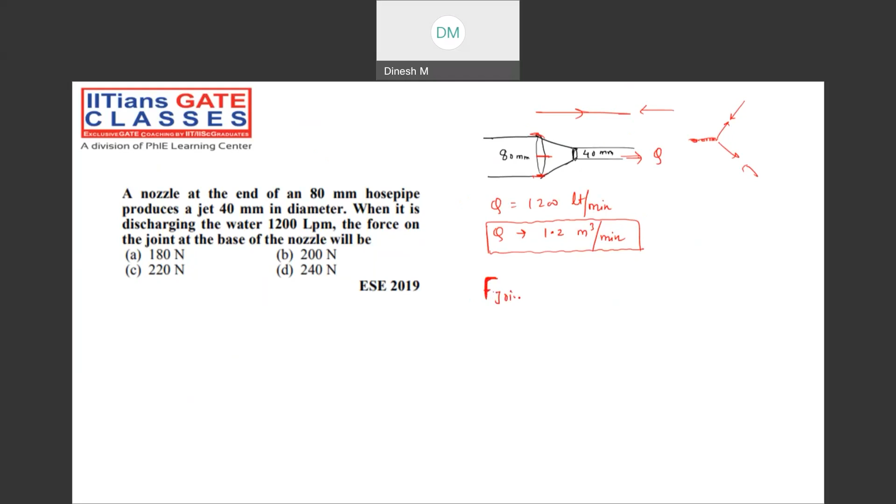By looking at the figure, the water is going to move in the horizontal direction only. So whatever joint reaction is coming, that is going to be in the horizontal direction only. So for the force of the joint, directly I'm writing rho into q, that is the mass flow rate, into final velocity minus initial velocity, because I told you the force exerted by the plate onto the fluid element will be final minus initial. If you check the initial session of this class, that is final minus initial.

So what we can write: rho is 1000, q is 1.2 by 60, and the final velocity can be calculated from the discharge formula, A1V1 equal to A2V2. Put the value of q, get the value of V1. So V1 will be 1.2 by 60 over area, pi by 4 d1 square. What is d1 square? 0.08 whole square.

So if you calculate, you'll be getting 3.978 meter per second. Now if you calculate the v2 value, that is going to be Q divided by A2. Once you calculate, you'll be getting the value 15.915 meter per second. So now if you put 15.915 and 3.978 and calculate, this value is coming out to be 240 Newton.

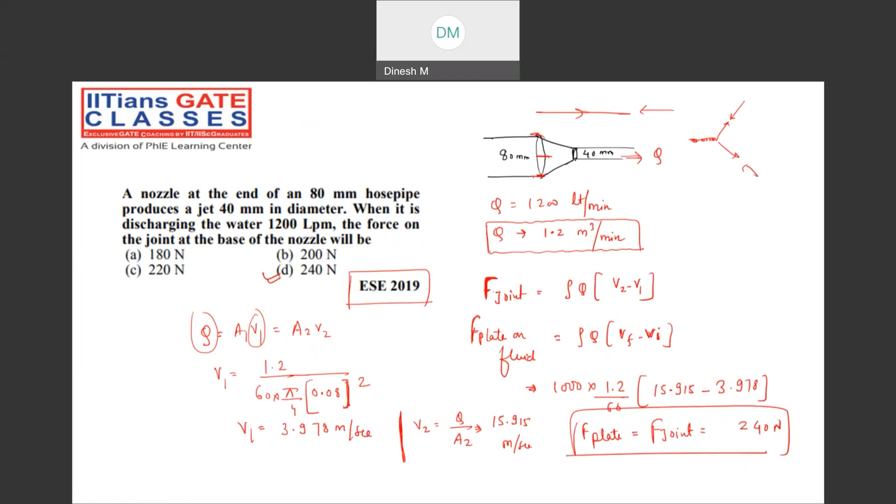Now we need to see the cases where we have the curvature blade, right? Before discussing Pelton turbines, we will discuss case number 4 and see what we can get from that. Now this jet is coming out from the nozzle and it is striking the moving vane symmetrically. First we are going to consider symmetrical strike, then unsymmetrical strike.

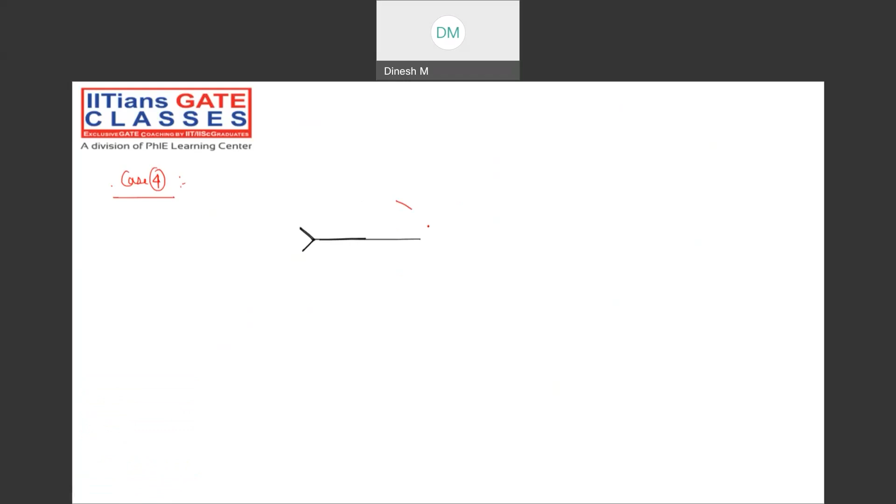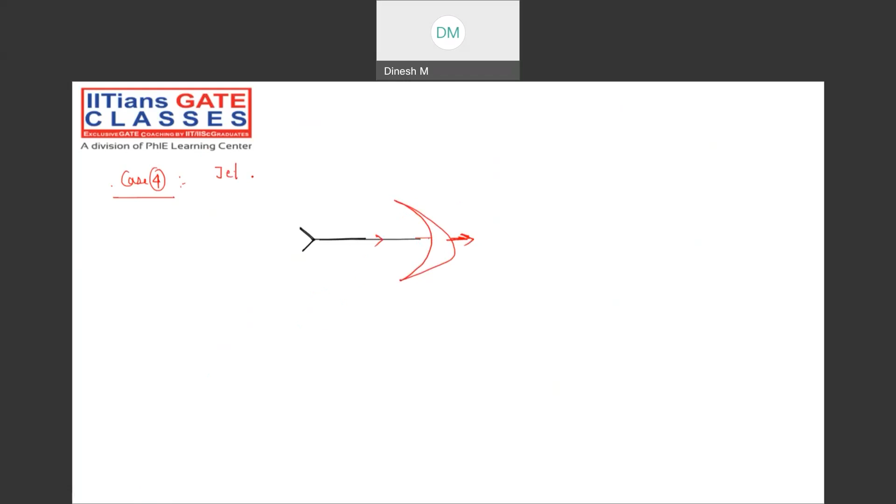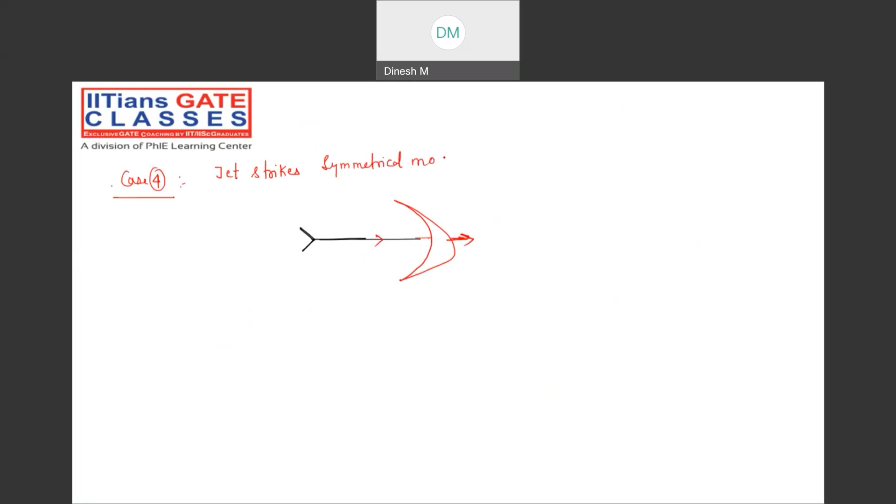Now the blade is there in the form of curvature like this. It's striking with the velocity, and this blade is moving. You call it vane or blade, both are the same thing. So now jet strikes symmetrical moving vane. Symmetrical means striking at the center. Whatever water is striking is striking exactly at the middle, exactly at the center point, my dear friend.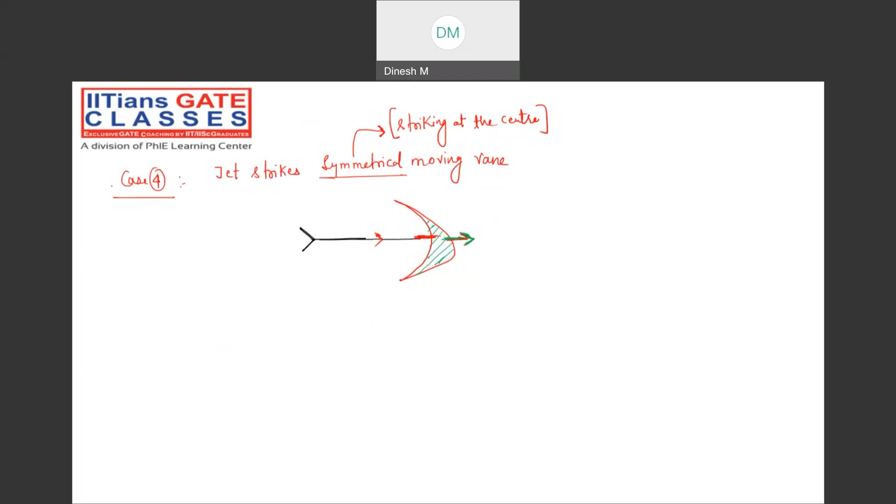Now, what is going to be happening here? This is going to be point number 2, and this is going to be point number 1. One by one, I'm going to draw the velocity triangle diagram. Of course, it is moving like this because it is in the horizontal plane. Now in this case, there is a slight difference from the cases that we have seen previously.

Inlet velocity triangle will be the same. First of all, U1 will be there, then VR1, and of course V1. Notations are the same. V1 is inlet jet velocity, U1 is inlet blade velocity, and VR1 is inlet relative velocity of the jet. You can write over there: inlet relative velocity of the fluid with respect to blade. Blade or vane, both are the same thing.

And of course, I'm going to write one more assumption, because these are very important for analysis of the flow through this vane. The major assumption we are going to follow is smooth vane. There's no friction at all, so VR1 will be equal to VR2.

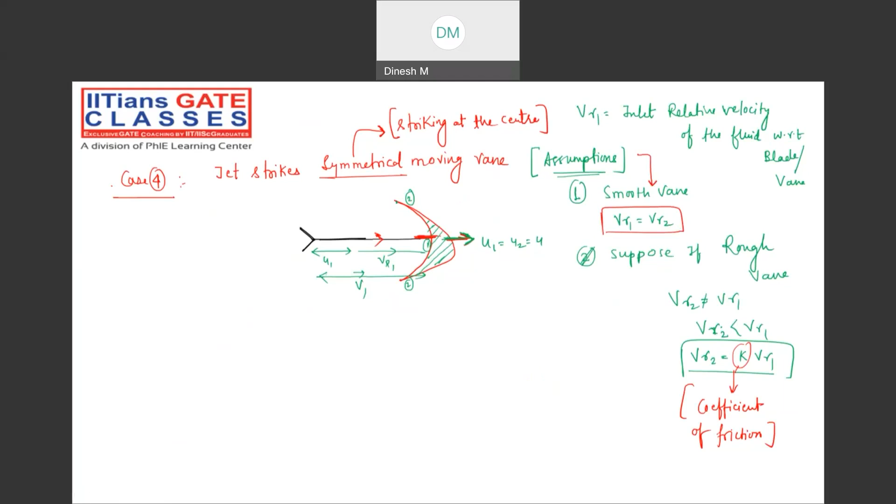If smooth vane is mentioned, we follow this; if rough vane is mentioned, we follow this. Of course, K value will be given in the problem. Now try to understand the picture scenario: in which case U1 cannot be equal to U2, when the flow is happening like this. Check it out. These are very fundamental things that we are observing, my dear friend.

The fluid is coming in at point number 1 and coming out at point 2. Suppose the radius at point 1 is R1 and at point 2 is R2, from the center point of the shaft. What is the velocity of the blade? At inlet it is R1 into omega, and outlet velocity of the blade will be R2 into omega. But here, my dear friend, what is going to be happening with respect to shaft?

Wherever the blade has been attached, my dear friend, the point is not at all changing. Suppose it is going to be striking at point 1 only; there itself we have point 2 also. Just like that, water is coming at the same point and leaving at the same point.

Water is coming in at the same point and leaving also at the same point. That is also a very important consideration, my dear friend, that we need to consider while doing the analysis. Now let me make this clear with one more example, so that things will be clarified to you.

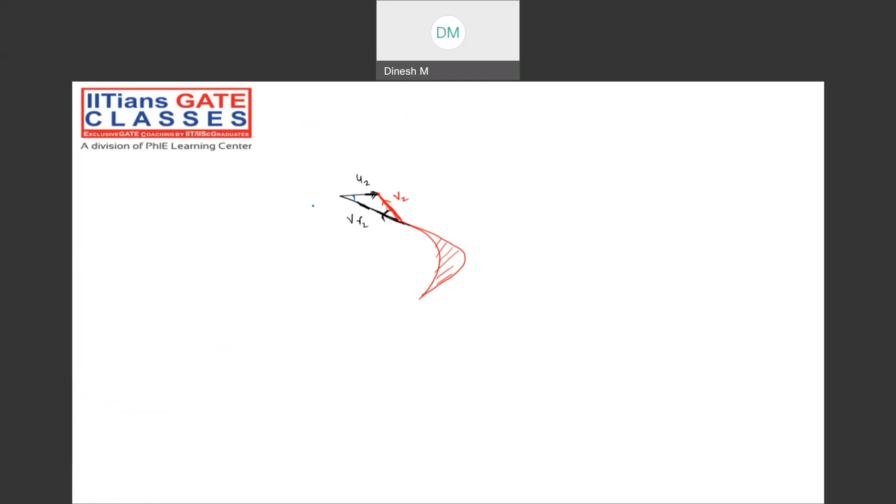Now what will be the absolute velocity? The absolute velocity will be something like this; this is my absolute velocity V2. Now let me take some angle. Suppose the water is coming out at a deflection angle phi. So this will be my phi. And let me call the outlet fluid angle beta, right?

And here also it is the same thing: VR2, U2, and then V2. Here the angle is phi, and here the angle is beta, my dear friend. That is how the outlet velocity triangle is formed: VR2, V2, and U2, with phi and beta. Please note down, this is a very important segment: the outlet velocity triangle.

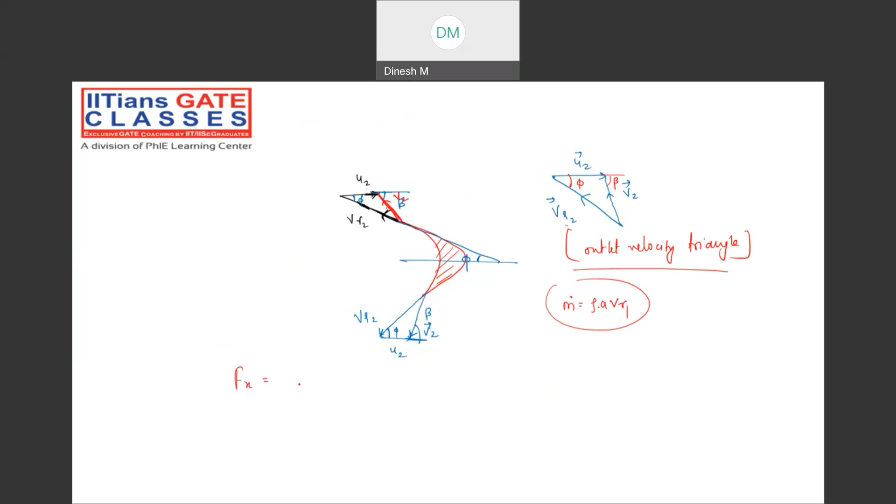Because if you are not able to form the outlet velocity triangles, you will not be able to solve the problems. So the mass flow rate will be rho into A into VR1, the mass flow rate with which it strikes the vane. Now force in the x direction: mass flow rate times initial momentum VR1. What will be the final momentum? Half of the mass flow rate goes in this direction and half in this direction, so mass flow rate by 2.

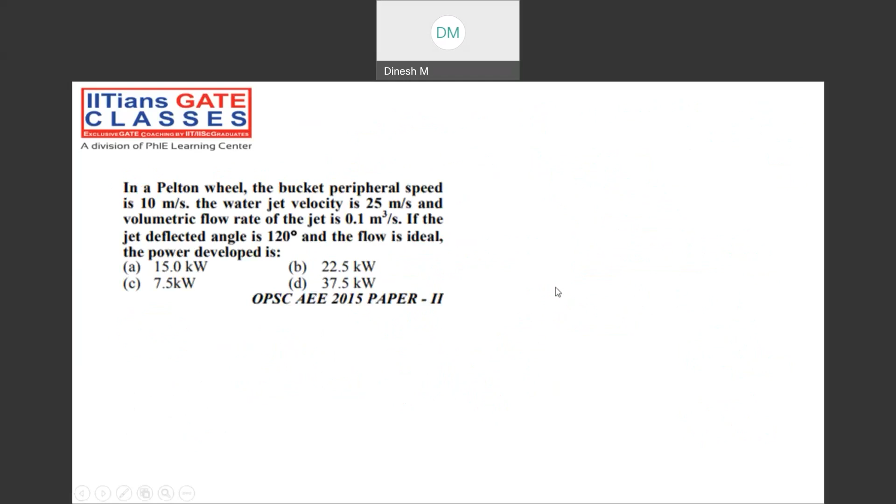The velocity with which it comes out in the x direction will be VR2 cos phi, but in the negative direction. Sir, why is it different from the previous cases that we have seen? Try to observe. For the vertical plate, look at the outlet velocity triangle that was formed and how we developed that formula.

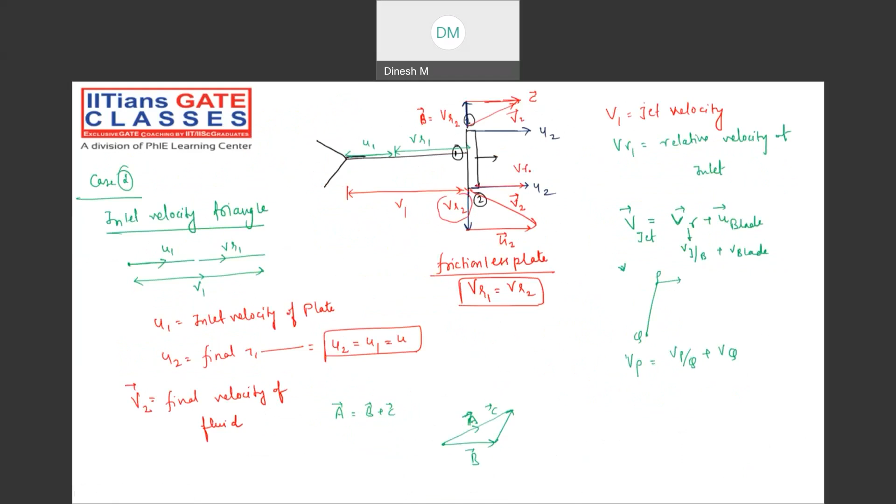VR1 is the velocity with which it comes in the x direction. But in that case, why have we not taken this component? See, this relative velocity in the horizontal direction is 0, my dear friend. That's the reason we have taken 0. Check it out.

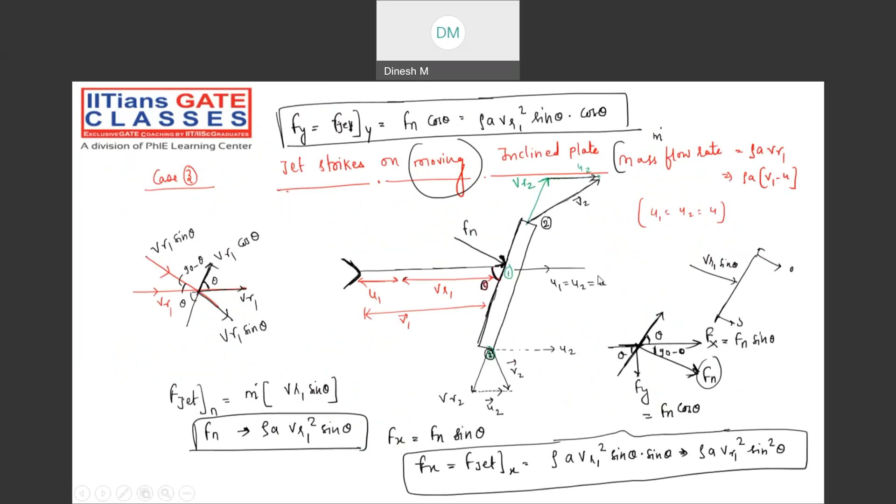The same thing I'm going to follow here also, my dear friend. In this particular case, whatever cases I'm showing you right now, the same thing I'm going to follow. Inlet relative velocity, observe. Which method am I going to follow? The first method, of course. What is the first method?

Observer is sitting onto what? The vane itself. Observer is sitting on the vane itself, and it is just observing that the plate is stationary or the vane is stationary and the water is striking with the velocity VR1, not V1. Suppose you are sitting on the vane and looking at the water, you will think it is moving with velocity VR1, not V1, because you cannot see the absolute velocity.

You are sitting on the vane itself. Only if you are sitting outside can you see the individual absolute velocity. Apart from that situation, you will never see the absolute things. You will always see the relative phenomena. So inlet velocity, VR1. Simple funda: whenever we consider the plate or vane is moving, simply remember one thing.

Of course, here U2 is U1 itself. Remember one fundamental thing: we always have to take the relative velocity whenever the plate is moving. When the plate is not moving, only the water is moving, then the absolute thing will be there. Suppose you are standing on the platform, and now the train is moving, my dear friend.